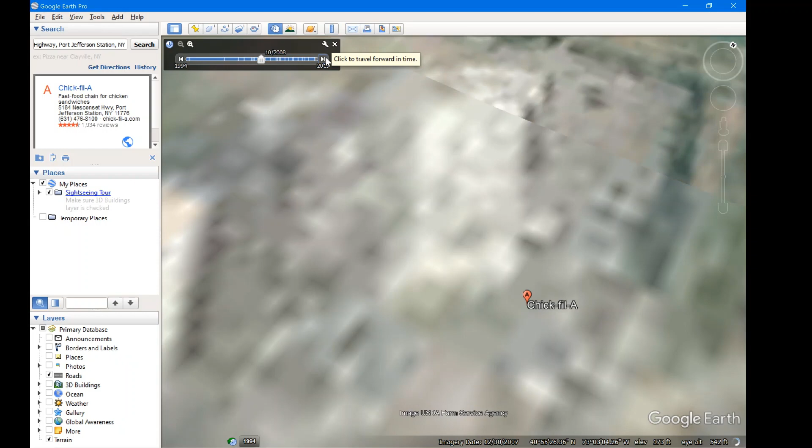So, too many tabs open. Okay, so let's go back in time, jump in the time machine to 2008. And that's what this place looks like. I think it was a car dealership, if I'm not mistaken. Yeah, that was a car dealership back then, or a service store, something like that. And over time, the business went out of business, and they developed the site. We're getting there. Okay, so the buildings are taken down. They raze the site. They remove all the material, all the foundations, all the asphalt.

And the first thing to go in is, look at that, beautiful. I love seeing those rings. What are they? That's your drainage structures, your drainage and also your sanitary rings. Those things are put in place right away. That's going to be part of your stormwater management plan, your SWPPP, which you'll learn about in green building. We were supposed to do a little bit more of that in site plan. We just kind of ran out of time. But you can also see the installation of the foundations as well. So we have our stabilized construction entrance, all the drainage required for a site like this, all the sanitary, I believe this is sanitary here. So all that's put in place.

And then as we go forward in time, that was quick, what was that? That was a year. All right, not so quick. Beautiful site. And you really can see how these areas, we have the buffer screening in the back. I can't draw on this one. We have the buffers in the back with all the trees back here along the screening. You have your drive-through with a queue. Remember the queue is where we line up cars so they can come through the drive-through and pick up whatever they need to pick up. And then we have the entrance and exit through there.

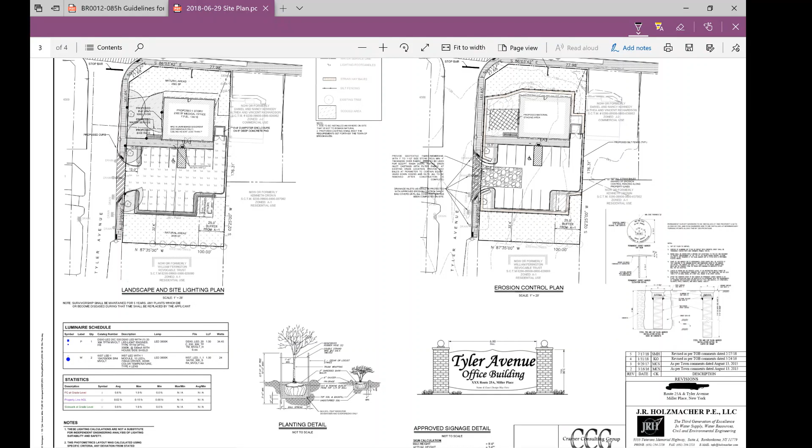So knowing that that's a problem, we always take the islands and we make them, oh, not that. What did I just do? We always want to make them 3 feet shorter than the ends of your parking spaces. Okay, so just keep that in mind. Always going to be the case.

You also want to keep areas set up where people don't park. Okay, this little triangular area here. What's great about that is that counts towards the landscaping requirements in the parking lot. It also prevents people from parking in those areas. If I have a parking space here, there's a 9 by 19. Here's a 9 by 19. I'm really just jamming in spots wherever I can.

Well, why didn't I put the spot like this? Why not make a 9 by 19 here and then make this all landscaping? I could add some more landscaping there. Could have been done, but I was able to sneak one extra spot in by doing it a little bit differently. So just think a little bit outside the box sometimes. Think of different ways of setting it up and use things like Google Earth as an example to see what's a good way of designing things and what's a not so good way of designing things.

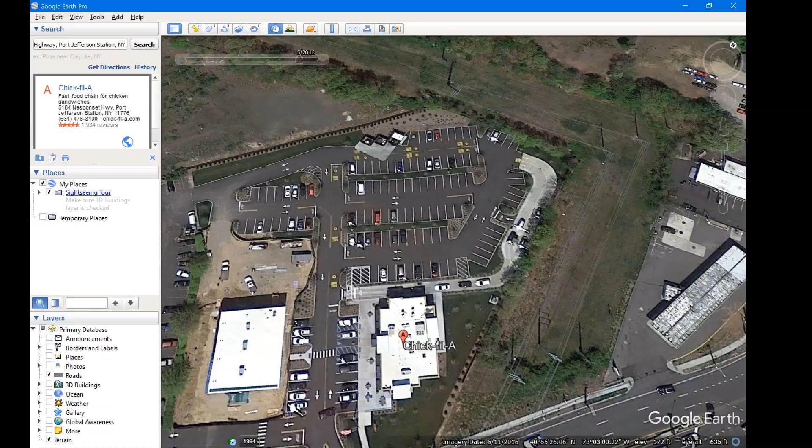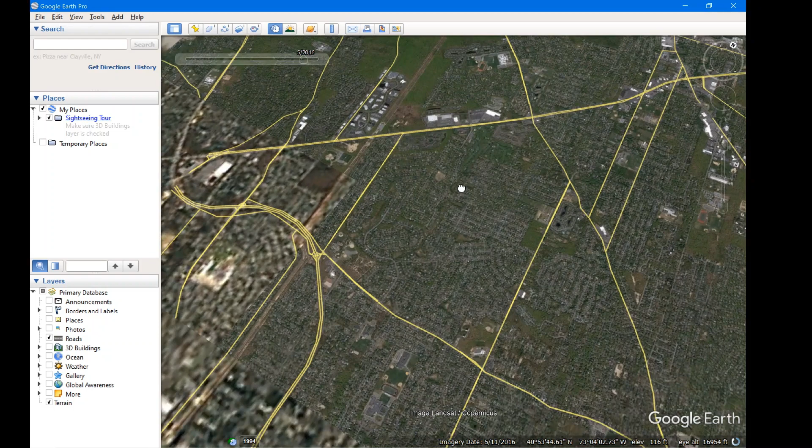Let's take a look at some poorly designed parking lots. So if I had to pick one place in Suffolk County where things are poorly designed, let's see. Get my north arrow back up north a little bit. Good old Suffolk Community College. Okay, their parking lots are atrocious, which is good for us. Okay, these are old systems. This is an old design.

Well, first of all, the college is its own entity. We don't have to follow anybody's requirements as far as site plans go. We do have to follow Department of Health, but we don't have to follow Town of Brookhaven, and we don't. But in doing so, it makes it a bit of a problem. So let's look at the parking lots.

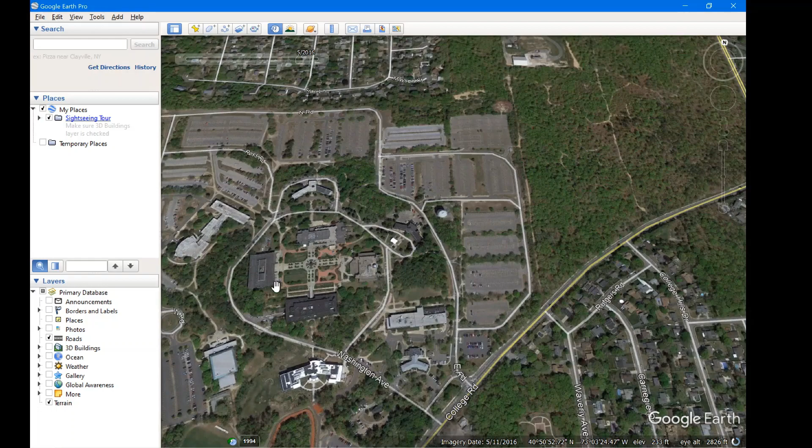Just as a refresher, I know you haven't been there in a while. Remember, this is off limits to you. That's my parking spaces. Please don't park there. You can do whatever you want back here, but don't take my parking spots.

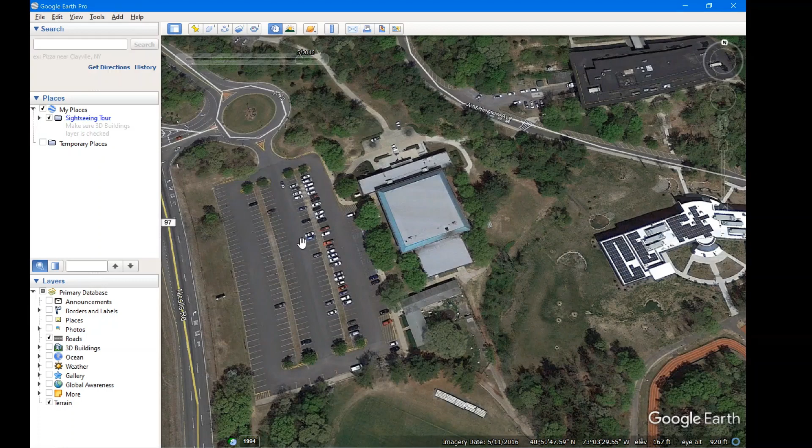But let's take a look at this. This is the first poorly designed parking lot to talk about. So when you're designing a parking lot, what you want to do is you want to make sure that when you're, let me just quickly screenshot this, and this way we can draw on it while we go. Okay, so let's say that I park back here. You got there late. It's the only spot that's left. So now you have to walk all the way across to the gym.

To do that, you're going to have to go through the cars, up and over the grass, through the cars, then jump out into traffic. Then through the cars, up over the grass, through the cars, right out into traffic. Don't do that. Okay, this is a bad way to design.

I know they did it because you fit more cars in here, but it's much safer if we aligned everything where, and we're just kind of doing this on the fly, if we put the islands this way and you had parking spaces on either side, you will not fit as many cars in here, but it's safer for the occupants. And isn't that what we're all trying to make sure we do? Keep this safe for people walking out.

So now, if you're parked over here and you walk out, there we go, you can safely walk down the traffic aisle without any worries of cars jumping out and surprising you. And if you think about this, if there's like a van parked there and you're walking out and there's a van blocking everyone's view and someone's speeding through the parking lot, even though there is a speed limit of I think 10 miles an hour, people do 30 in the parking lot because they want to get home, they want to get out of there.

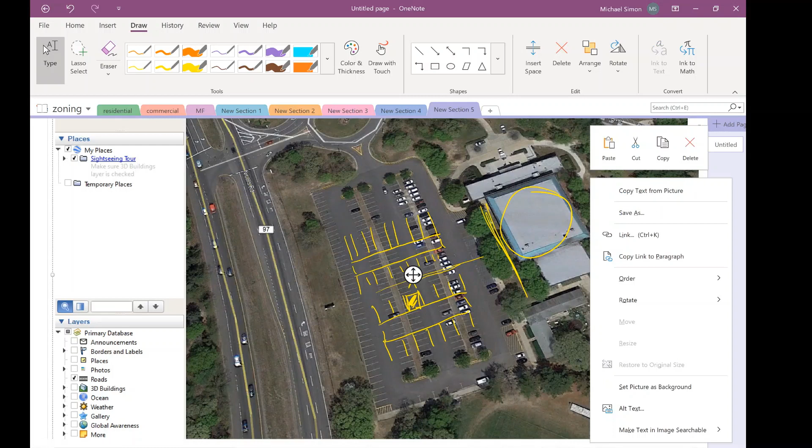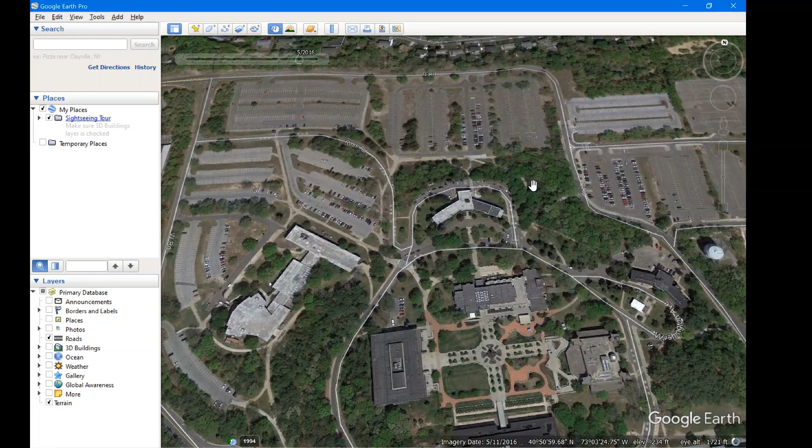So try and design things where if your building is here, you always want your parking spaces to have a perpendicular drive aisle to the face of the building. Just good practice to have. So let's see if the college does that anyplace else. So we're going to go back into these parking areas. Well, these parking areas are so far away from the buildings that it's really not too much of an issue. But let's go into these anyway. Let's start in the very, very back at this parking lot.

So first of all, line striping. A little bit squiggly. That should be a little bit straighter. But did they change this? Yeah, they've just kind of touched up a little bit. Let's just take a look at some of the things that they've done wrong on here. So these areas here, these are called the gores. Okay, it's just a painted area to prevent people from parking there.

That doesn't stop people from parking there. Okay, all that does is it creates a line that says you shouldn't park here. But if you want a physical barrier to stop people from parking, build a concrete island and landscape it. Here they switched ideas. Well, maybe we'll make it triangular instead of having a radius to it. You got to have some consistency.

They redid this parking lot, okay? And this one came out much, much nicer. I'll show you what it looked like before. It was just kind of rows of parking. Actually, from a safety standpoint, it was not bad because as you exited your vehicle, you could walk down the traffic lane to the path. But now they've made it a little bit nicer. They put more parking on the sides.

We have the islands. And what's nice about those islands is it stops people from driving down and directly into the cars. We see people still do a great job of parking in between the lines, maybe not. The islands also give you a nice, if we measure this, we should have at least 24 feet of a continuous traffic aisle through there. It's just like we'd have over here. So much better job with that parking lot.

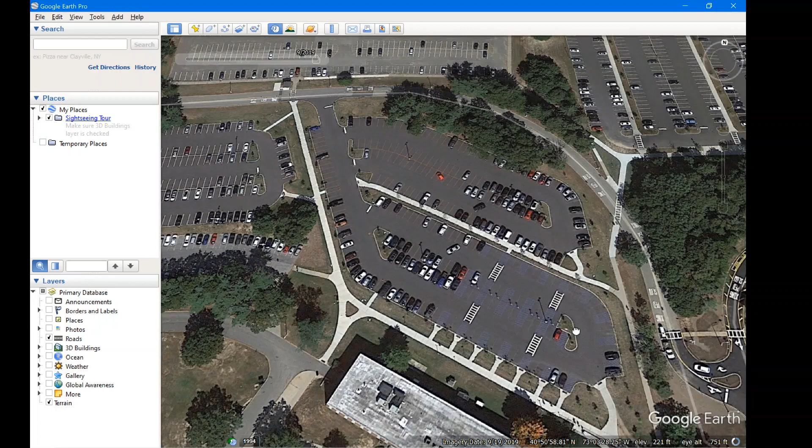Even here, these were redone. Look at all the ADA accessible, handicap accessible parking spaces that are in here. So it's nice to see that they finally put that stuff where it belongs. That wasn't there for the longest time. If we go back in time, we had some. That's a little blue over here. The rest of it's red. And remember, red means don't park there. That's my parking spaces.

But when they were done, actually, I'll show you the difference between those two. I don't park there, so I haven't seen what it looks like in a while. It used to be 3 parking lots, and they wound up reconfiguring it to 2 parking lots. And I think they actually got more cars in there when they were all done, but it just looks nicer. I mean, yes, the asphalt looks nicer, but if you look at it from a standpoint of, I love the way the islands cut in there. I think that's a really nice look inside of all the parking lots, and it's functional as well.

The idea behind this is when you exit your car, you get yourself onto that sidewalk as quickly and safely as possible, and then you can carefully walk down the sidewalk and go to the rest of the campus as needed. Crosswalks are very well delineated, so people know that this is a walking path where you need to be driving more carefully.

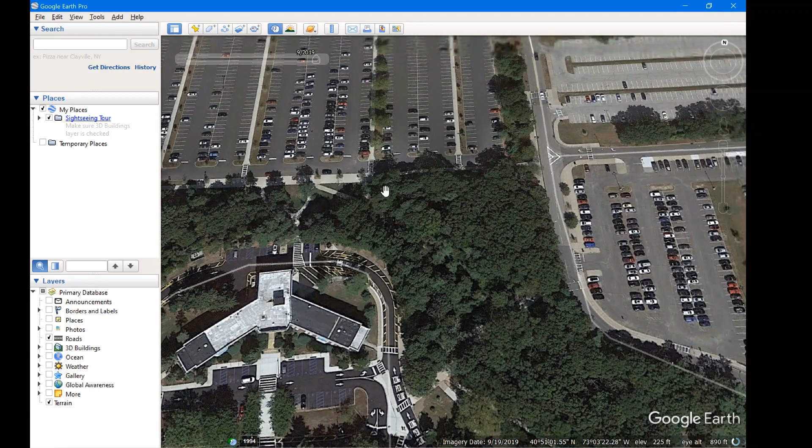Okay, so then we have this parking lot. And with this parking lot, they kind of got lost in the process of doing it. They wanted to put some landscaping in place. And they have another large section of landscaping here. But what this should have been is they should have taken this and distributed it a little bit more between the rows of parking.

By putting these large sections in here, yes, it does give the benefit of having a cooling factor where it's not as large of an amount of asphalt, but we'd like to see more landscaping in between the individual parking spots, because as you start parking next to each other, some people bump into the back bumpers, and that landscaping acts as a nice preventative of that.

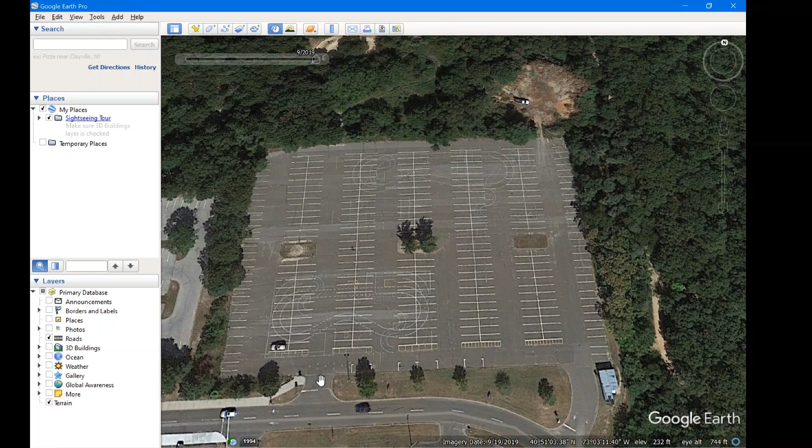Here's an example. There's really no landscaping back here. Okay, in an area like this, if you're parked back here, you're just going to drive straight across to get to the exit. There's no incentive to follow your way down the rows. Whereas if you have landscaping and you want to get out, you can't cut across. You have to follow the curb line to get yourself out of there.

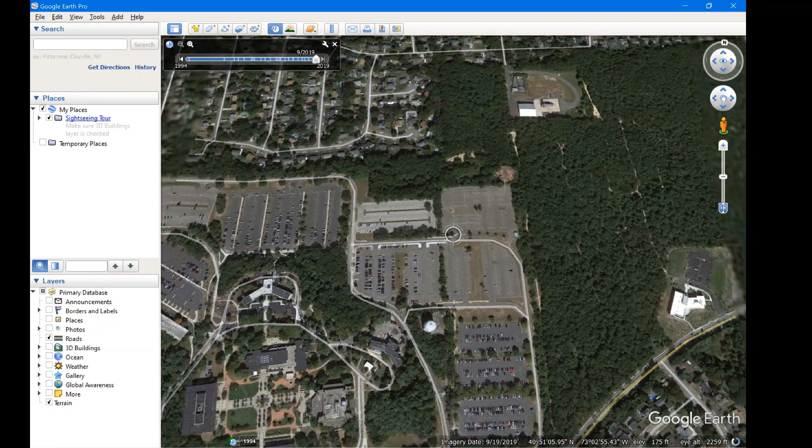So what I'm saying with this is use examples of good parking areas and bad parking areas to set yourself up for the future. Okay, take a look at lots of examples. There's tons of stuff available through aerials like this. Let's take a look at one more.

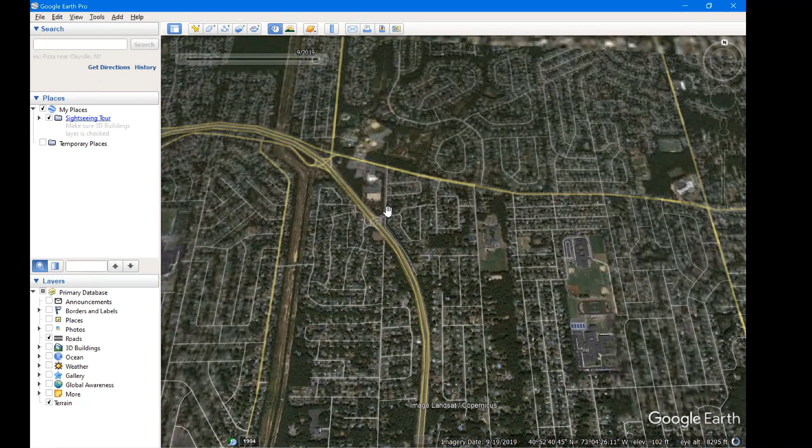I just lost track of where I am.

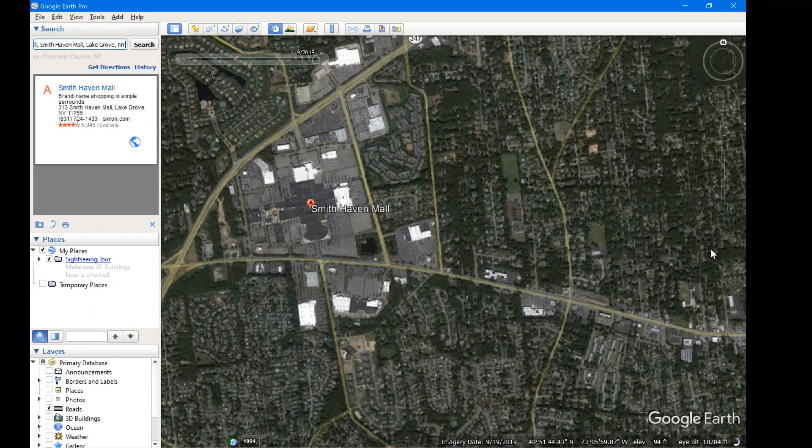Smith Haven Mall. Plenty of parking there. Boy, it's a lot of asphalt. Okay. This is a structure that's been around for a long time. And if we take a look at the old areas of parking lots, okay, this is an older section of parking lot. You'll notice that it just has rows of cars and that's it.

If we take a look at the newer sections of the parking area that they've put in place, you'll notice that when they redo parking areas for new site plan applications, which means it had to go into the town and get approval, you start seeing the landscaping come in. Okay, and landscaping serves two purposes, or actually more than two purposes. It gives you a nice cooling effect because those trees do break up the expanse of asphalt.

That's one thing. It stops people from driving 90 miles an hour across the parking lot, so it becomes a safety break as well. And the third thing is when we get snow, I know we didn't get any snow this year, it gives you a place you can store snow, okay, right on that center island and even on the outside. So landscaping of parking lots, okay, when they expanded the mall, this was also a newer section that was added in there. More landscaping. Every other row, they kind of landscape through here.

Okay, islands help delineate where the traffic goes, and act as a bit of a buffer. So if you want to have parking, put it up against the landscaping block so people don't stick out into the traffic area. So like I said, look around. There's plenty of examples out there of good and bad parking designs.

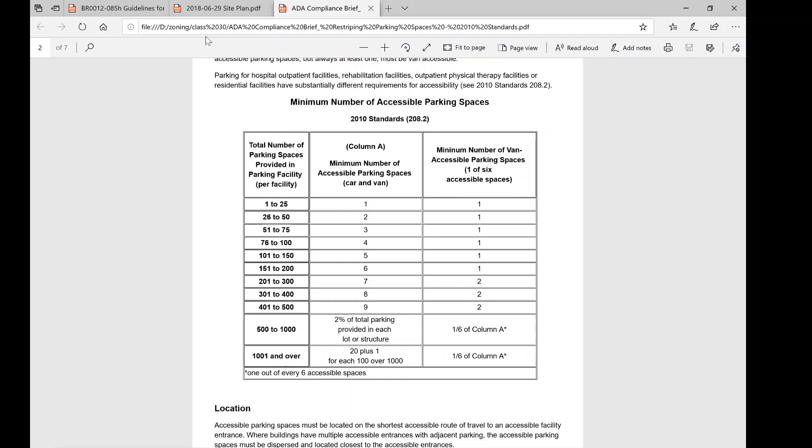The catch with that is you can always park a handicap vehicle in a regular spot, but you cannot park a regular vehicle in a handicap accessible spot. So you have to make sure you do provide enough regular parking as well. As far as the calculations go, these are the numbers we're working with.

So what we're looking at is that when you have a certain number of parking spaces, either 1 to 25, 26 to 50, whatever that number is, you have to have a total number of parking spaces as per column A. So 1 to 25 requires 1 handicap space, 26 to 50 requires 2 spaces, 51 to 75, 3 spaces, and so on.

Of those total number of spaces, 1 of them needs to be van accessible, and when you get to the higher numbers, 2 of them need to be van accessible. There's a difference in the size between a handicap accessible space for a car and a handicap accessible space for a van. Vans require more space than cars do. So a car can always park in a van spot, but a van cannot always park in a car spot.

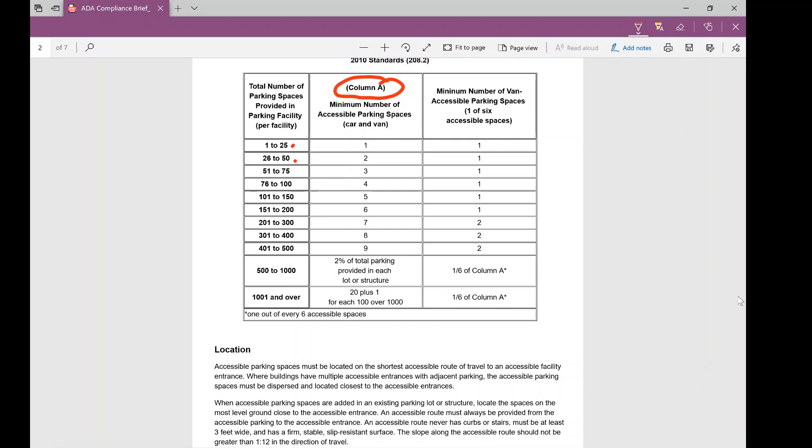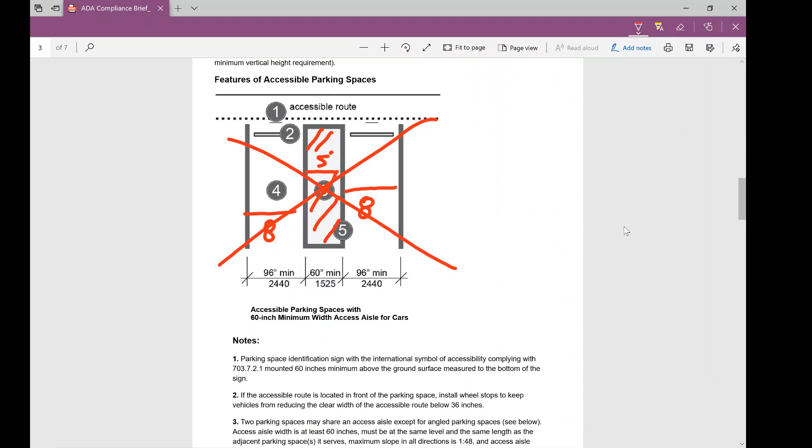I would strongly recommend you design all your spaces to be van accessible. This way, cars and vans can use them both. Now let's take a look at exactly what the difference in size is. Just erase that real quick. Size-wise, we're looking at

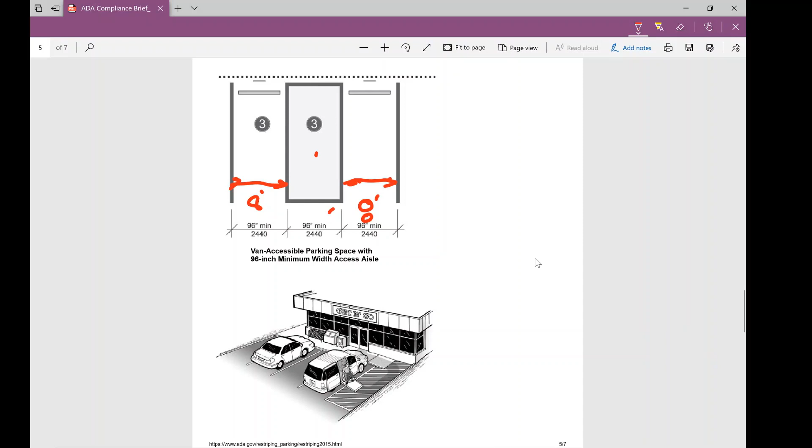your van space being 96 inches for the van space itself. That's going to be 8 feet from there to there. Then we have another 8 feet for that van space. That's the width of the parking spot. And then the striped area in between the spaces, that's also 8 feet as well. So 8, 8, and 8, 2 parking spaces share one striped section. If you only have a single parking space, you need to provide a full 8 feet of striping as well.

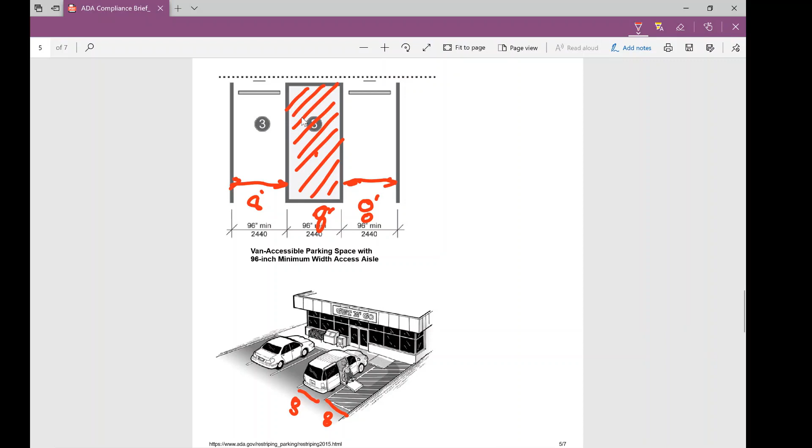So we see in this diagram here, from here to here, that's 8 feet. There to there, that's also 8 feet as well. You have to provide all that space. But 2 cars can share the same 8-foot section at the same time. Now that differs from a car accessible spot.

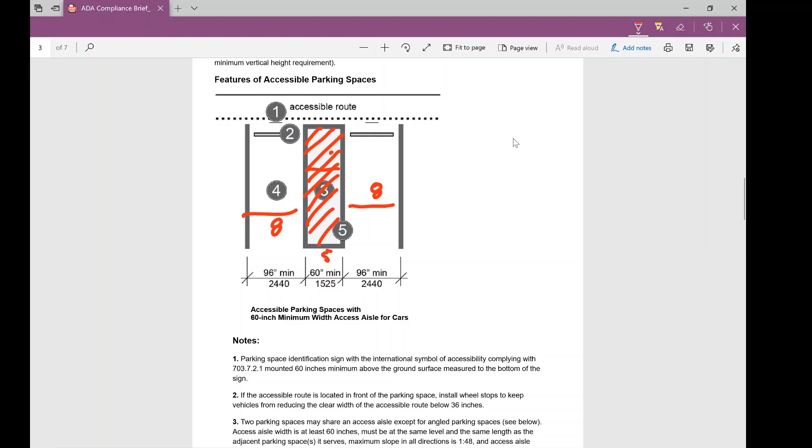Car accessible spots are also 8 feet wide, but the difference is the width of the striped area. The striped area is only going to be 5 feet wide. And the reason why is you don't have these large ramps coming out of cars as you would a van. But my suggestion, keep everything as an 8-foot wide space all the way across. It just makes your life much simpler.

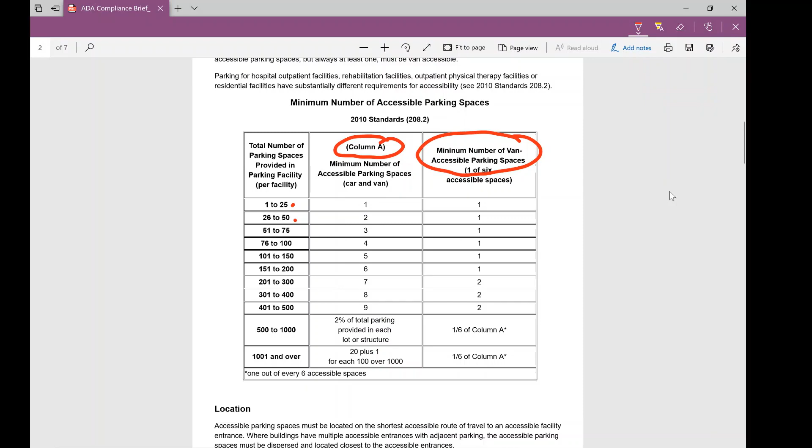Now in terms of the calculations for the number of spaces, very simple. If you're between 1 and 500 spaces, you just pull the number off the table. But if you're over that, then it gets a little bit more difficult. So let's say we have an example of 1,500 spaces. If that's the case, you need to have 20 for the first 1,000 spaces, and then 1 additional for each 100 over the 1,000. So that would be 500 extra spaces. That would require a total of 5. So 25 ADA spaces.

I would personally round it up to 26 so it's an even number, and the reason why is 2 spaces can share a single striped area. So if you have to put an 8-foot wide space and an 8-foot striping, you might as well put 1 extra handicap accessible spot on there. It's not going to hurt the parking lot, it's only going to enhance the parking lot.

Now these standards are included in the total number of spots. So if the town of Brookhaven requirements say you need 88 spots, then that would fall here between 76 and 100. 88 spots would require 4 ADA handicap accessible spaces. So that means 84 regular spaces and 4 ADA spaces. It's not in addition to, it's inclusive of.